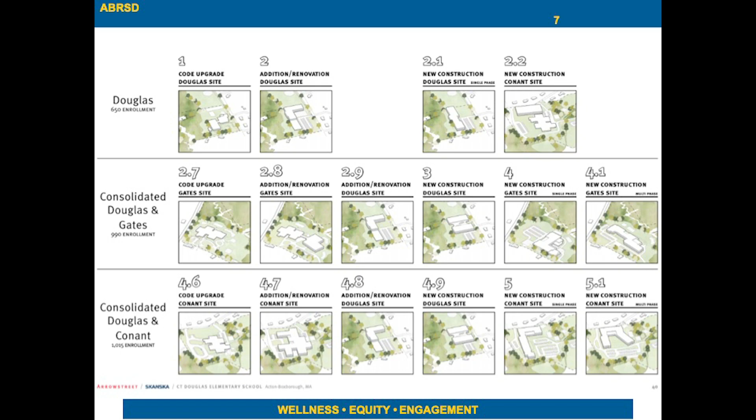We ended up choosing the Gates site for a number of reasons. When looking at the Douglas site, there were 2 real driving factors. First, the site was just too small to house a combined school. Second, there's a floodplain around the Douglas school that limits its buildable area.

At the Conant site, we realized that there is sufficient acreage to be able to build on. However, there is a patch of wetlands right in the middle of the location where we would want to put a school that eliminated the Conant site from consideration for the idea of a twin school.

And then finally, at the Gates site, we were fortunate because there was sufficient area next to the school to be able to construct the building, and it was buildable, even given significant considerations for the wetland sites around that and the various floodplains. So that is a little bit of our thinking around how we ended at the Gates site.

We also looked at this idea of building a twin school from a cost-effective standpoint. One of the first projections that came in from Arrowstreet were a series of cost projections around what a new building would cost.

As you can see from this slide, option 2, listed at $91.5 million, was to keep the Douglas School on its current site and build an addition onto it to increase the classroom capacity. So that would renovate the building we're in tonight, and add classrooms, at $91.5 million.

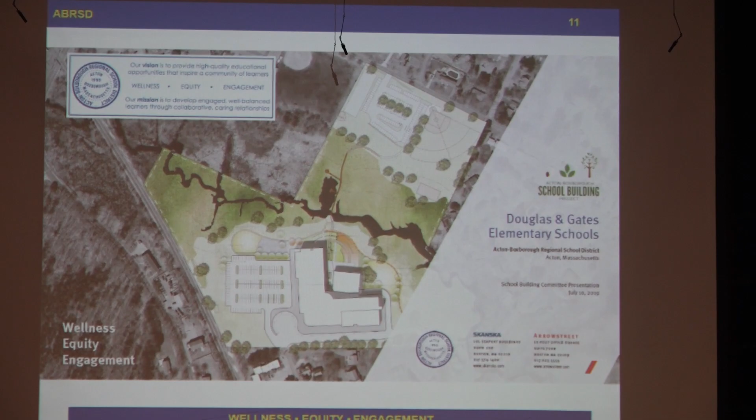This parking lot on the north part of the site is the current location of the Douglas Elementary School. For those of you here tonight in person, we are sitting right about the second tree here. On the south side is the current site of the Gates Elementary School as it sits right now. The bridge in between is that beautiful boardwalk through the wetlands and the waterway.

Spruce Street is located to the south, and Arlington Street is just off of what the visible area is.

To give you a sense of how the site circulation will work, we will continue to have vehicle traffic only coming in from West Acton via Spruce Street. No buses will enter or exit via Spruce Street. Parents and staff will be able to come in and park here, with some parent drop-off along the front of the school, circulating back out. This also provides access for a second preschool entrance specific to that age group of students.

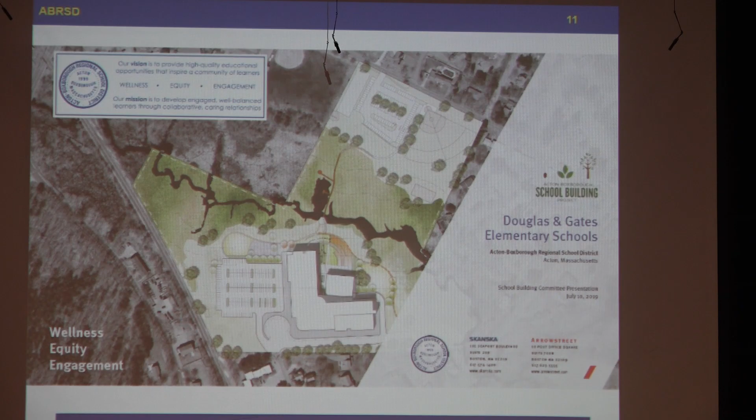Buses will continue, as they do now, to serve the Gates School right off of Arlington Street, entering and exiting through the driveway located there. They come in the front. There's sufficient area here to stack all 13 buses that serve this school. They turn around in the traffic circle and head right back out the same entrance they came in. We currently run bus service for Douglas and Gates on a combined schedule, so there's no increase to the bus traffic coming into this school.

We also recognized that traffic in West Acton was a concern for the community, so we built a secondary parent drop-off located on the current Douglas site.

In a picture, this seems like a long walk from the Douglas site over to the Gates site, but it's actually the same distance we currently have at the Parker Damon building, from the parking lot to the school. So there's really no significant distance people would have to travel to have a parent drop-off on the Elm Street side and then come across the bridge and enter the school from the back.

Plans for the footbridge include a renovation of that bridge. We believe we're able to use the existing footings, but we will widen it to make it a plowable width so it can be maintained during the winter months, and we're also planning on making that a covered bridge for West Acton. We think that's a benefit not only to our students and families who will use that bridge year-round, but also to our community who uses this extensively throughout the school year.

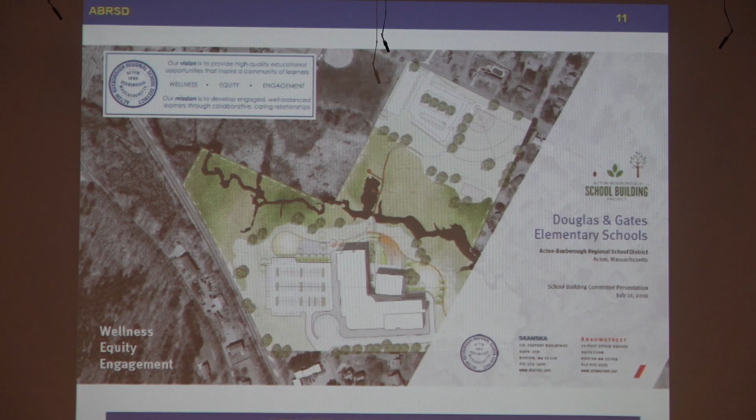I want to talk a little bit about educational benefits with this facility. With a modern school come a number of types of spaces that we don't have available to our students right now at either the Douglas or Gates school.

We are planning to build a 2-story library media center that's accessible from both schools. This has ample space for the stacks as well as breakout spaces for students and faculty to teach and work in small and or larger groups.

We also have 2 science, technology, engineering, arts, and mathematics labs, called STEAM labs. This is the first building that's being planned where MSBA has recognized that these are important parts of an educational design and is reimbursing for the design and construction of these spaces.

We also are able to have 2 multi-purpose rooms, designed as music and art rooms, that can either be opened up to have one large space for professional learning or full grade level assembly meetings, or closed off and used individually for typical classroom use throughout the year.

We also have a large learning commons, which is a public exhibition space for students and faculty to gather. We could have grade level meetings, we could have multi-grade level meetings. We can use that to demonstrate student work throughout the school year and really welcome the community into our school.

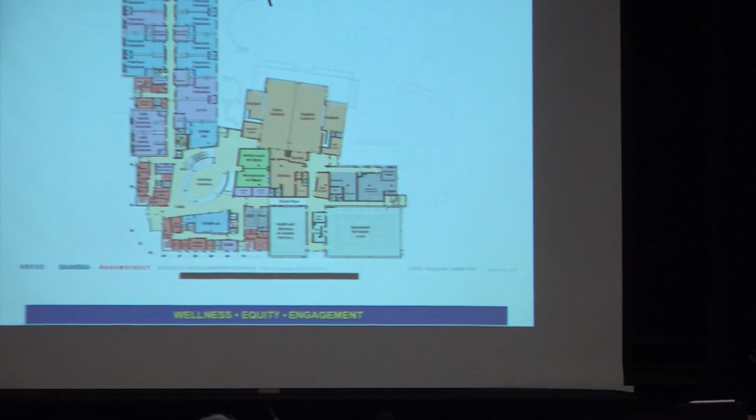This is the floor plan for the first floor. The way we designed the school—if you're familiar with the Parker Damon building and the Merriam and McCarthy-Towne schools—that school is a left and right configuration. When you enter the Parker Damon building, on the left is 3 stories of the McCarthy-Towne School, and on the right is 3 stories of the Merriam School. In this building, we took a different approach because we wanted our schools to feel like a smaller community, based on feedback from our faculty, students, and administrators.

The first floor you see here is all of the common spaces of the school. The second floor is all the Gates School, and the third floor is all of the Douglas School. So once students get to their floor for their classroom, it's really a 1-story school that they spend most of their day in, and they're only accessing the first floor for some of those specials.

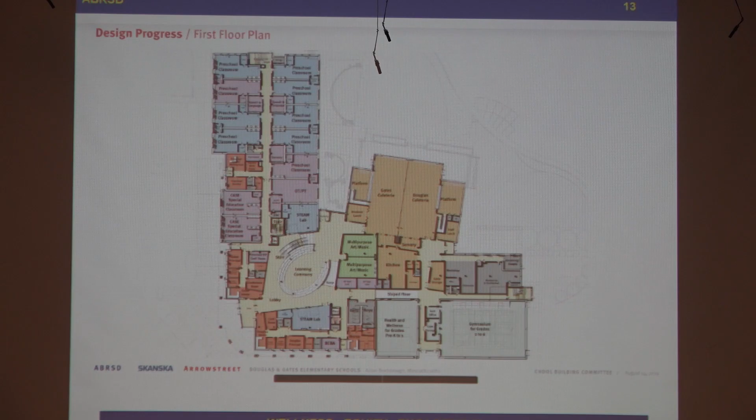At the bottom of the screen is the Spruce Street entrance to the new building. When you come in, the main entrance of the school is located in the southwest corner, and as you enter, there's a double vestibule for security purposes. When someone enters the first vestibule, they can turn left into the Gates School Administration Suite, or turn right into the Douglas School Administration Suite. At that point, they'd sign in at the desk, and then be permitted to enter the school.

The Learning Commons, which I talked about before, is this horseshoe-shaped area. These are actually a set of stair risers, so that the lower level is actually depressed into the site plan for the school. It also allows us to work with some of the topography of the existing Gates site.

I mentioned 2 STEAM labs to increase the district's focus on science, technology, engineering, and arts, and these are prominently located around that horseshoe of Learning Commons, so that we can really bring learning to the front and center of what we're doing in each of these schools.

The north side of the corridor is designed for the preschool, with its own separate administration area and entrance. It was very important when designing a school for our 3- and 4-year-olds that we make this part of the school feel small for them. We didn't want them feeling like they were entering a very large building, so there's a separate, smaller entrance, administration, and separate parking for preschool families to drop students off.

And then we have our 9 preschool classes. The coding that you see in colors is just to delineate the difference between some of our regular education and special education classrooms. That's done for state accounting purposes.

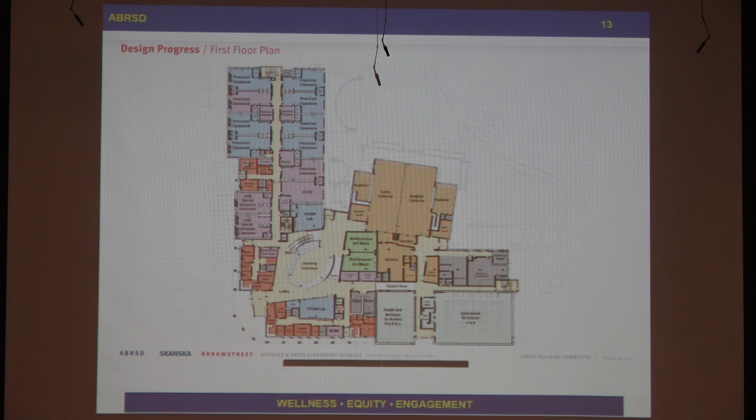On the second floor, this is the Gates School, and I'll talk a little bit about this in detail, and then the Douglas School on the third floor is very similar, so I won't duplicate my efforts there. I'll go from north to south along here and then work east.

This set of classrooms are our kindergarten classrooms, and then first grade right across the hall from them. As you work down here, you see second grade, third grade, fourth grade, and then a separate wing for fifth and sixth grade students, because we know developmentally a fifth and sixth grader is very different from a first or second grader. So providing a separate space is very educationally appropriate.

I mentioned that every two classrooms share a small breakout room, and you can see that located here. I'll show you a picture of that in a moment so you see how it looks in a classroom. But you can see every two classrooms shares this similar room regardless of what grade level they're in.

I also talked about having appropriate spaces for math support, reading support, as well as some of our special education programs. You can see those smaller group rooms are all located interspersed throughout the hallways. Each of the two schools has both a music and art room located on its school level, so that the students aren't traveling up and down for those specials.

And then really the heart of this building is this idea of a two-story library media center. The first floor of the library media center is actually the middle floor of the school, and that is designed to house the traditional kind of stacks that we would see, as well as some learning spaces and breakout spaces. But then on the third floor, you can see it's open. We will have a railing. We were told that.

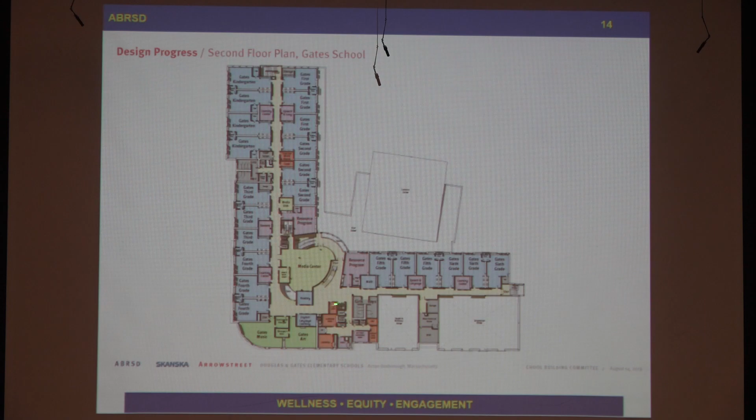This is the third floor, and what you can see, I'll just point out here because this will lead to a slide in a few more minutes. These rectangular shapes on this roof are actually solar panels, photovoltaic arrays, and we're showing you this on this rooftop, but the entire roof of the building has similar photovoltaic arrays. I'll talk about energy and sustainability in a couple minutes.

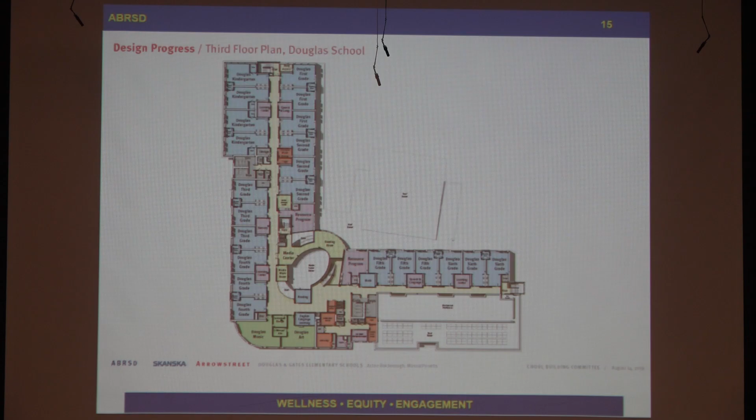This is an interior view looking into one of our classrooms. We wanted a welcoming space as students come from the hall, and you can see this first area right here is kind of a welcoming vestibule for students coming out of a corridor, where they have a place to sit, take off boots, hang backpacks, and there's some classroom storage for the teacher as well. On the opposite wall, which you can't really see, is a countertop with storage beneath, and also sinks for students to work right in the classroom and clean up.

Looking in from the vestibule, you are welcomed into the main classroom area, which is kind of the standard classroom. This was designed intentionally to bring a lot of light into the classroom and maximize the views from the environment into the school. Each of these windows is 4 feet wide by 8 feet tall, so it really gives you some perspective on just how much light and exterior view this room affords.

This wall over here is actually an example of that small project breakout room that I had mentioned before. It was designed with lots of glass so that if students are working in there, they're easily visible by the teacher in the classroom, yet able to work without disturbing what's going on in the main classroom area.

This is an alternate view looking into the classroom, where now you're seeing the classroom first, and in the background you see that welcoming vestibule for students as they enter the room. Over here on the right back wall is that breakout space. This door, while it enters from this classroom, has a similar door on the opposite wall to be able to go into the adjacent classroom.

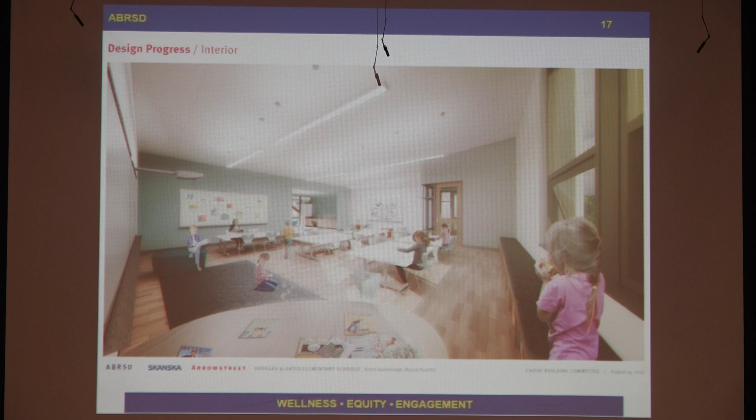This is an exterior view of the building, and I think Arrowstreet did a wonderful job. Arrowstreet spent a significant amount of time in West Acton looking at the architecture of the various buildings there. One of the nods to the West Acton community is the design of the various windows you see around. They were designed to mirror and imitate some of the windows that are prevalent throughout West Acton.

We also knew that we wanted something that looked like it belonged in Acton. We tried at first to have a pitched roof, but we knew we had a 3-story building, and if you add a pitched roof on top of a 3-story building, you end up with either a 5 or 6-story building, which was not appropriate for our community. So we settled on a flat roof, but the architects looked at the history of Acton and settled on having the building look similar to a mill building feel, so that it looked period to the town, even though it was a modern educational facility.

Another interesting thing I can point out is this bus loop and bus turnaround. It's separated from the car traffic pattern so that cars don't go in. It also provides our students some additional play space during the school day when the buses aren't present.

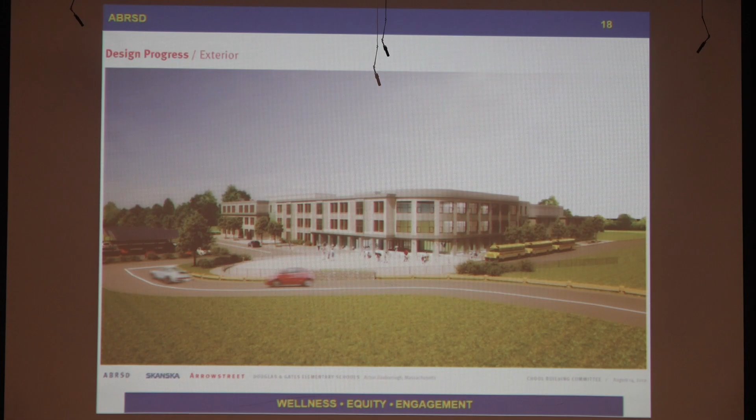And then over here, in addition to having solar panels on the entire top of the roof, you're actually seeing a solar canopy over the parking area. That is designed to maximize energy efficiency.

I'm going to talk a little bit about sustainability in the new building. This is a triple net zero design, and what that means is we're trying to achieve 3 different goals: one around energy, one around water, and one around waste.

The energy goal is that we are producing heat provided by a combination of geothermal wells and 2 additional electric boilers, designed to supplement those geothermal wells on the hottest or coldest days of the year. We're also able to achieve a zero combustion building, so there's no fossil fuels coming into this building—no oil, no gas, no propane. It's completely electric. The photovoltaic arrays and solar panels on the roof and over the parking lots are designed to produce 100% of the energy we need to heat the building and provide electricity.

From a sustainability measure regarding water, we're doing rooftop water collection. As it rains, we'll take that water from the roof, store it in underground tanks, create gray water, and use that water to flush the toilets.

And then finally with waste, there are 2 aspects. One is during construction and demolition, waste materials are sorted on site and recycled appropriately. Additionally, we're going to continue to work on the district's efforts around waste by enhancing our composting program and continuing our recycling program.